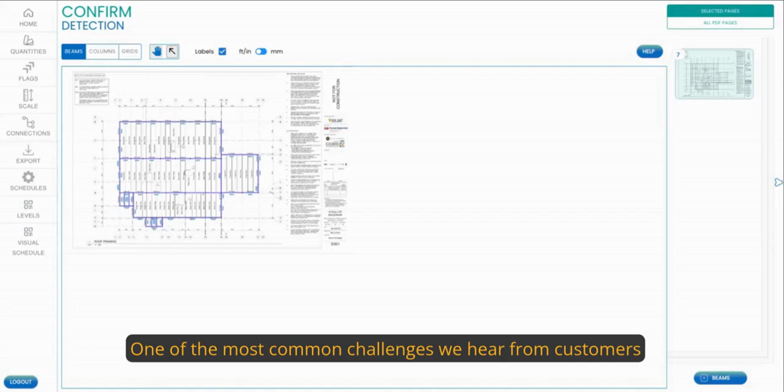One of the most common challenges we hear from customers is the pressure to quickly turn around rebids and change orders. You're probably familiar with a situation where you get a revised drawing set, you need to stop what you're doing, go identify the changes, and turn around a new bid or change order while work just continues to pile up. On average, we found it takes around 4 to 5 bid cycles to win a job, and this doesn't include the post-award change orders.

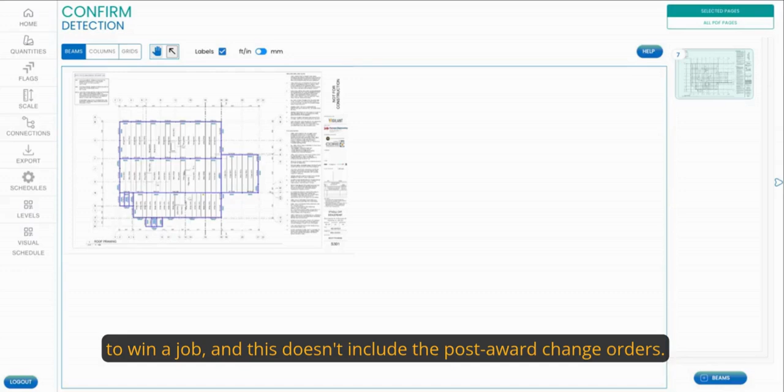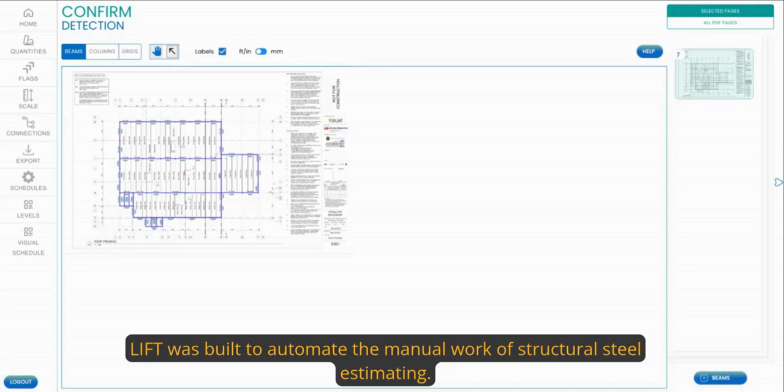For most teams, this means hours of manual comparison under constant pressure to make sure you're bidding and responding to change orders at the right price for your business. LIFT was built to automate the manual work of structural steel estimating. Takeoffs that used to take days can now take minutes. LIFT Plus takes that further by automating revision management.

In the next few minutes, I'll show you how LIFT can automatically identify changes between drawing revisions, update your takeoff, and produce documentation you need to bid or respond to change orders at the right price.

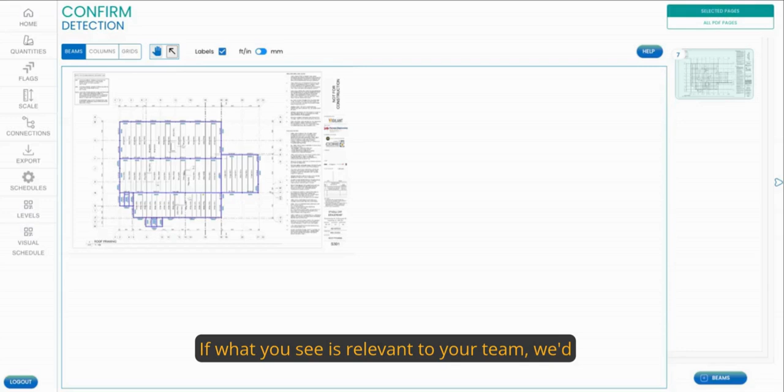Let's take a look. I'll be using this job as an example where I've already completed the base takeoff. On the home page, I can add a version, upload my revised drawings, and arrange these pages to produce a revised drawing set. In this case, since I've only done the takeoff on one page, I'll focus on page 7.

Here I can either transfer markups from the previous version, reanalyze from scratch, or use the AI comparison to have LIFT automatically do the work of making changes for me. It generally takes something like 1 to 2 minutes per page for this process to complete. I'll skip ahead here to show you the result.

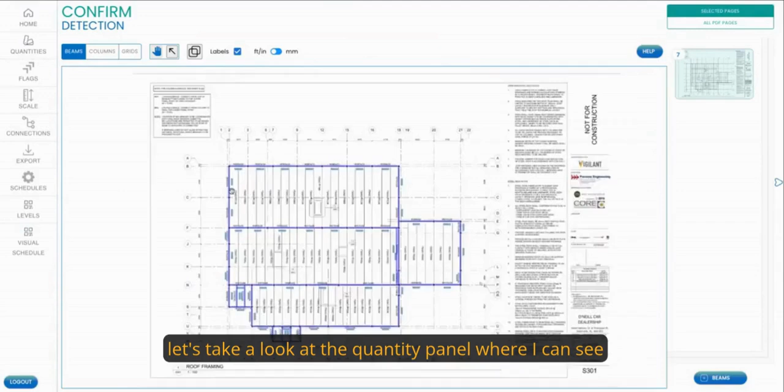Okay, now that my job is finished processing, let's take a look at the quantity panel where I can see a list of statuses where LIFT has automatically marked members as deducted, changed, or added as needed. If I turn on the overlay, I can validate the changes that LIFT has made.

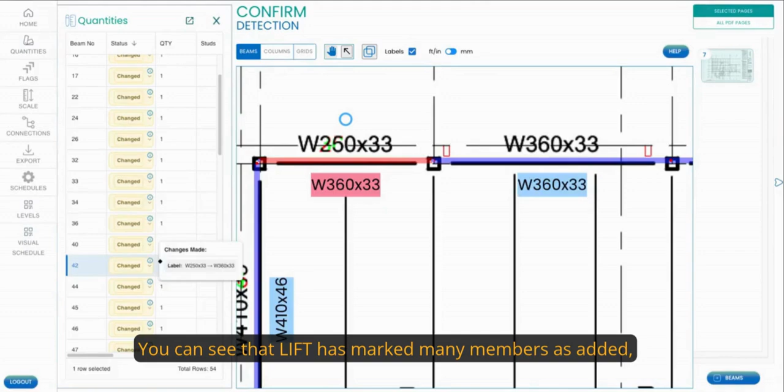And for example, by hovering my mouse over this member, see a record of the change from 250 by 33 to 360 by 33. You can see that LIFT has marked many members as added, changed, or deducted on this takeoff and created this auditable record of the changes that it's made.

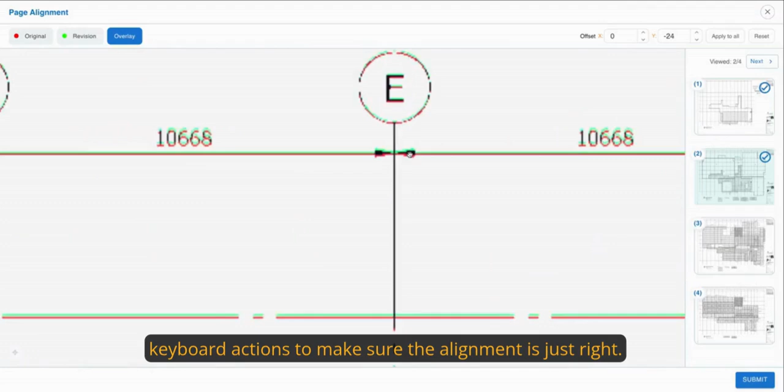In cases where pages are misaligned, we've also introduced tools to make it easy to fix the alignment so that you can get accurate results using a combination of easy click and drag and keyboard actions to make sure the alignment is just right. We've also got exports designed to make it easy to process this data.

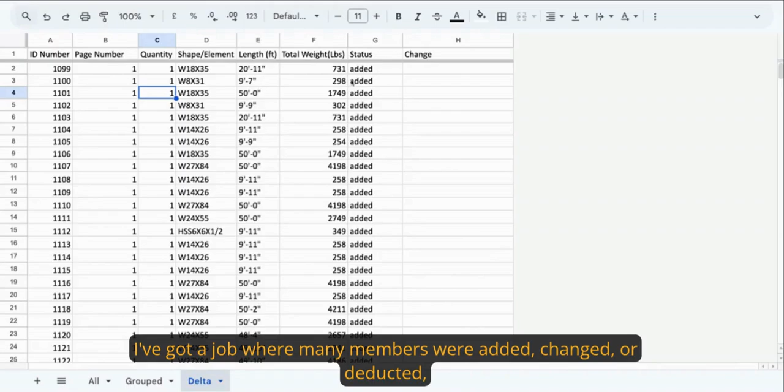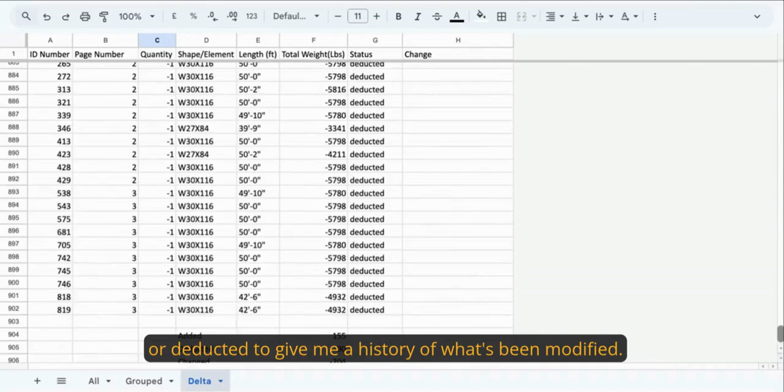As an example here, I've got a job where many members were added, changed, or deducted. And you can see in column G, the status is marked as added, changed, or deducted to give me a history of what's been modified. In cases where there are changes, those are indicated here. We have several ways of presenting this information to align with your estimation software or your internal processes.

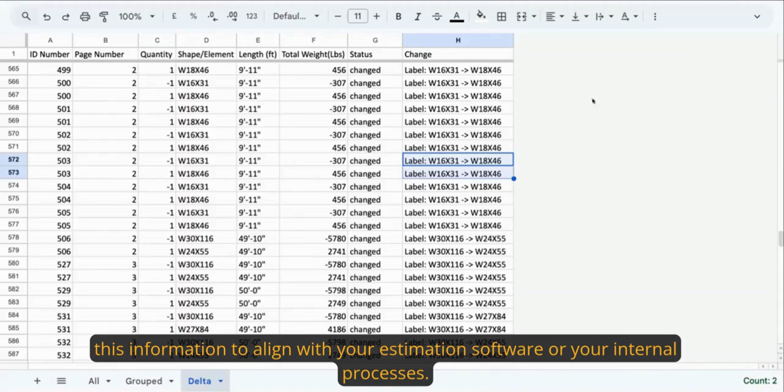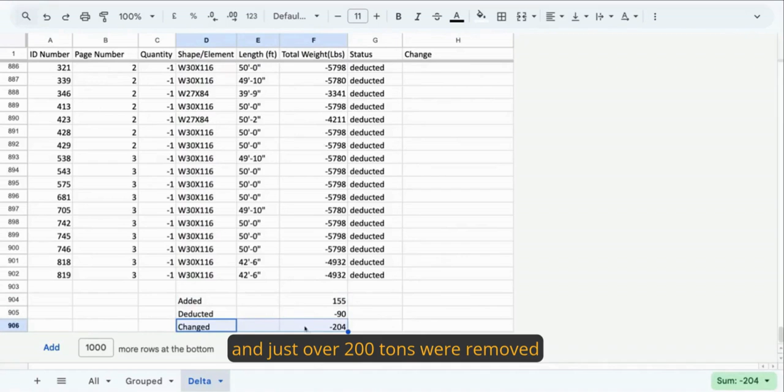I've also done a quick summary at the bottom here, where I can see that just over 150 tons were added, 90 tons were deducted, and just over 200 tons were removed as the net change of moving to lighter members on this job. This data was easy to get from Lift's export.

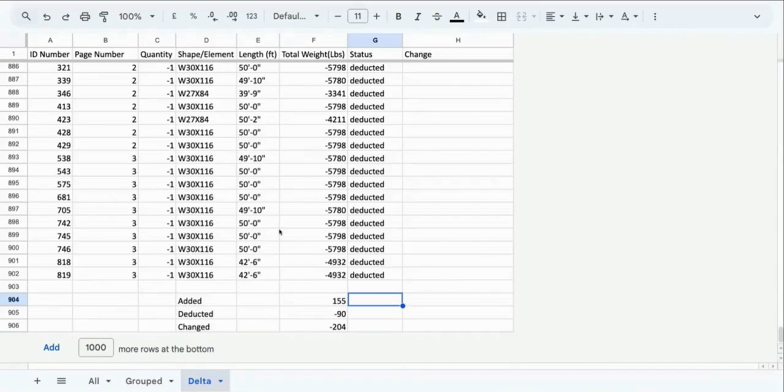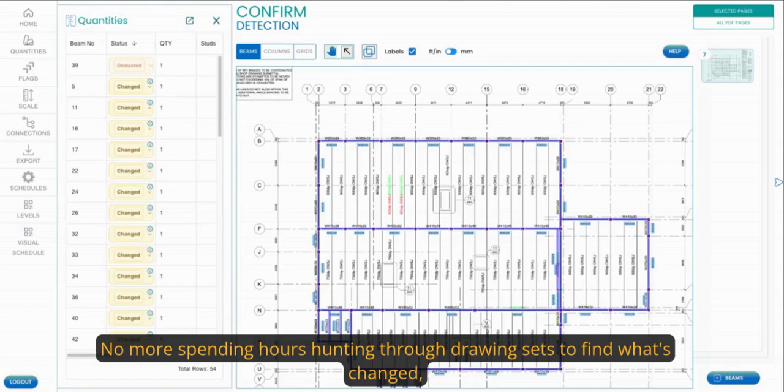So in summary, we've introduced new tools that allow Lift to automatically understand the changes between revisions, make changes for you, and create a log of what was updated. What you just saw is what revision management can look like when the manual work is automated. No more spending hours hunting through drawing sets to find what's changed, no more rebuilding quantity counts from scratch, and no more scrambling to document cost justifications under deadline pressure.

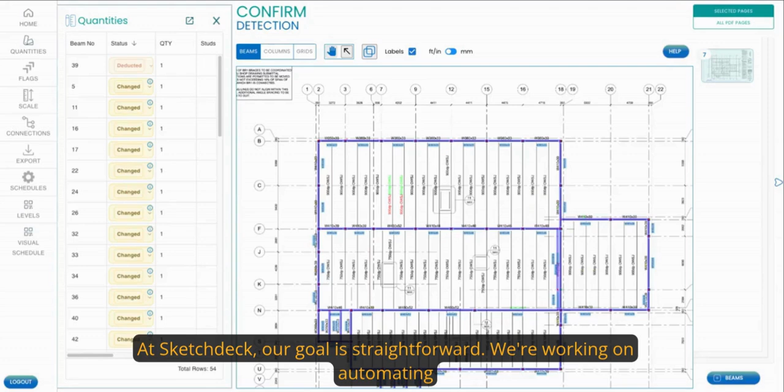Lift Plus detects the changes, updates the takeoff, and generates the documentation so your team can respond quickly at the right price to rebids and change orders. At SketchDeck, our goal is straightforward. We're working on automating the repetitive workflows in structural steel estimating.